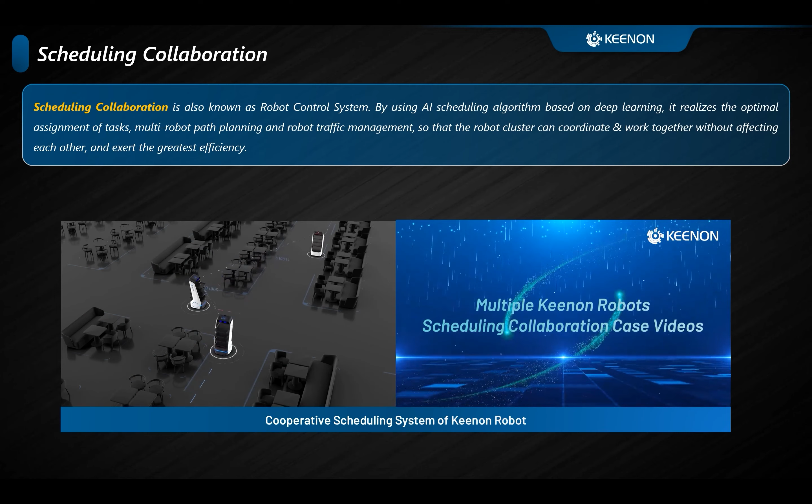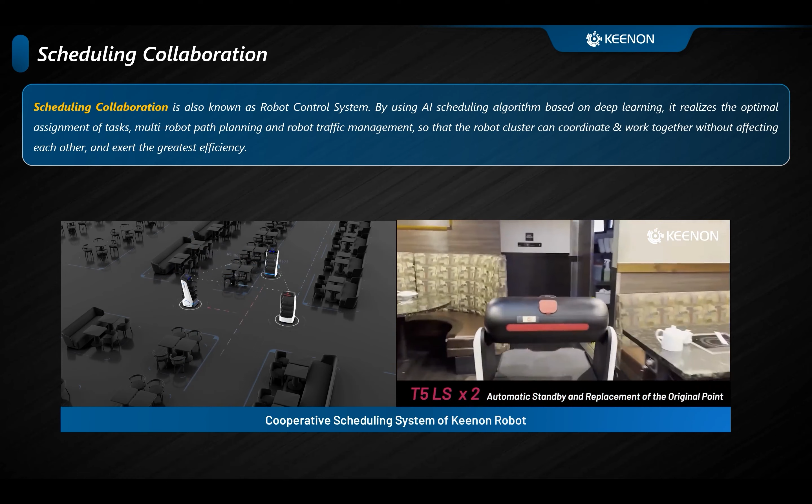Scheduling collaboration is the last term I would like to introduce in this first chapter. It is also known as robot control system. By using AI scheduling algorithms based on deep learning, it realizes the optimal assignment of tasks, multiple robot path planning, and robot traffic management, so that the robot cluster can coordinate and work together without affecting each other and exert the greatest efficiency. Let's see the video below, showing a multiple Keenon robot scheduling collaboration case.

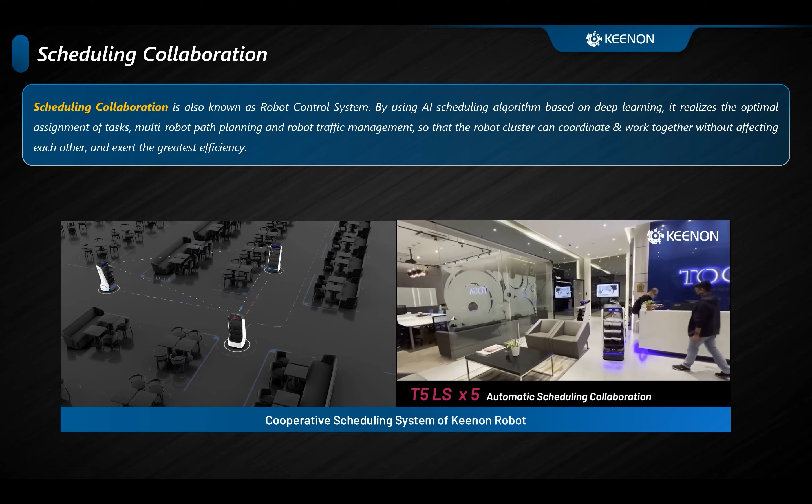After introducing robot-related terms, let's move on to the next chapter, robot-related sensors. They are crucial hardware for the normal operation of a robot, like eyes of a human being.

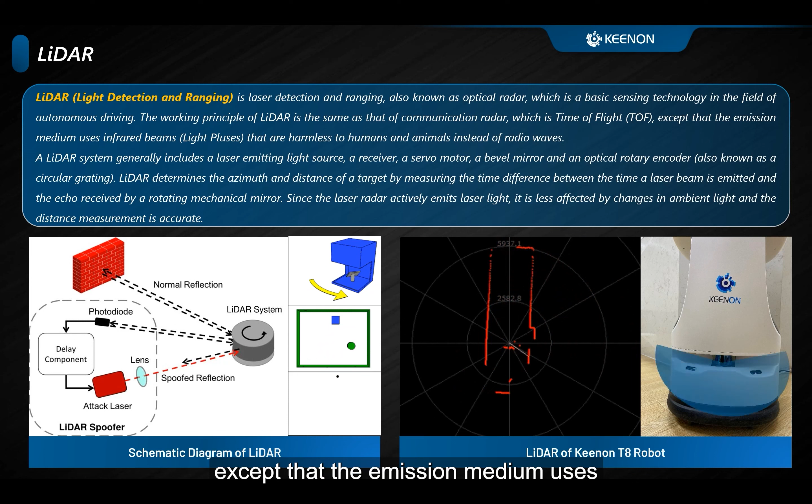The first sensor is LiDAR, which is laser detection and ranging, also known as optical radar, a basic sensing technology in the field of autonomous driving. The working principle of LiDAR is the same as that of communication radar, which is time of flight. except that the emission medium uses infrared beams that are harmless to humans and animals instead of radio waves.

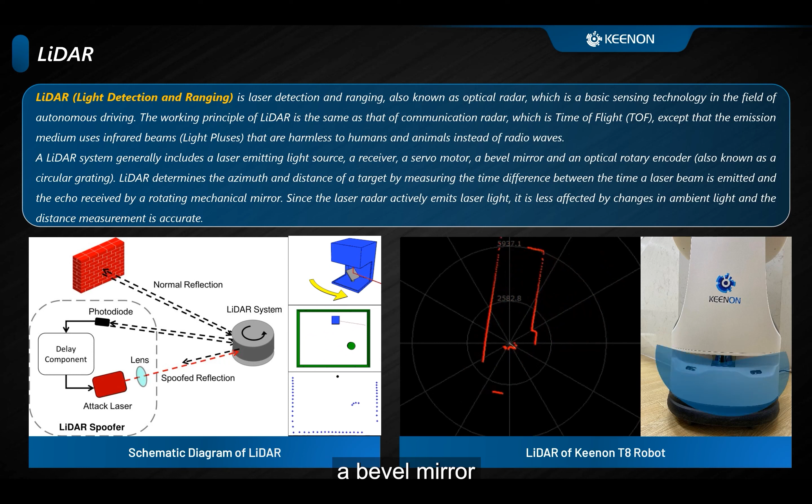A LiDAR system generally includes a laser emitting light source, a receiver, a servo motor, a bevel mirror, and an optical rotary encoder, as is shown in the left figure below. LiDAR determines the azimuth and distance of a target by measuring the time difference between the time a laser beam is emitted and the echo received by a rotating mechanical mirror.

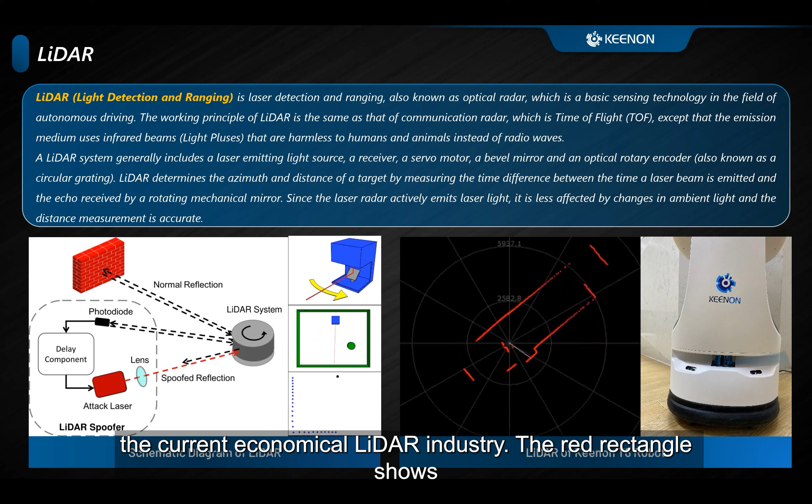Since the laser radar actively emits laser light, it is less affected by changes in ambient light, and the distance measurement is accurate. In the right figure below, it represents the sample rate of T8's LiDAR, which is up to 8,000 and is the highest in the current economical LiDAR industry. The red rectangle shows where the LiDAR is in the T8 robot.

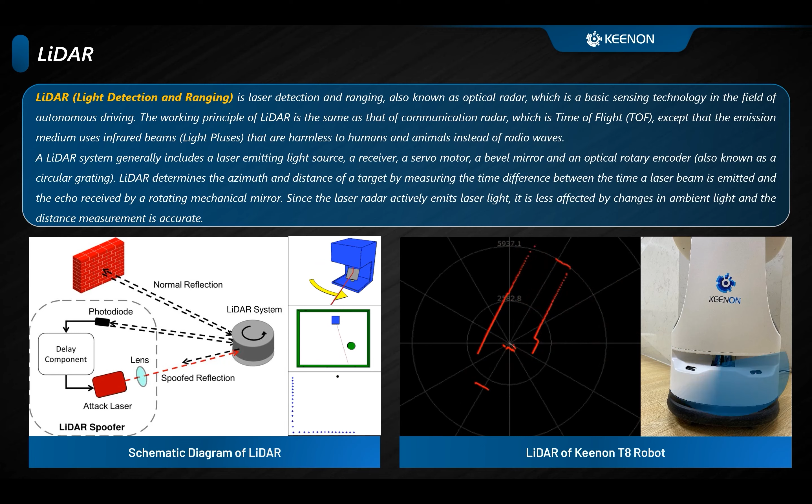Followed by LiDAR, the next sensor I would like to introduce is ultrasonic radar. Although it is not applied in Keenon robots, it is an extremely common sensor in the service robot industry or even other industries. It has a more popular name: reversing radar.

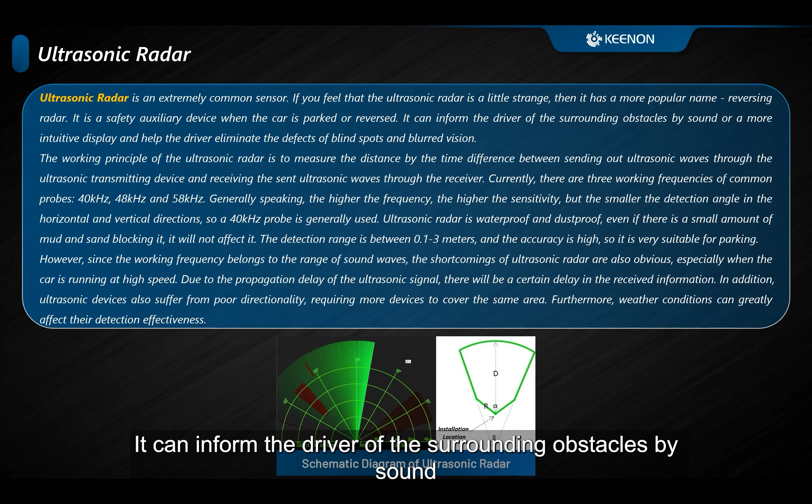It is a safety auxiliary device when the car is parked or reversed. It can inform the driver of surrounding obstacles by sound or a more intuitive display, helping the driver eliminate the defects of blind spots and blurred vision.

The working principle of ultrasonic radar is to measure distance by the time difference between sending ultrasonic waves through the transmitting device and receiving the sent ultrasonic waves through the receiver. Currently, there are three working frequencies of common probes: 40 kHz, 48 kHz, and 58 kHz. Generally, the higher the frequency, the higher the sensitivity, but the smaller the detection angle in the horizontal and vertical directions, so a 40 kHz probe is generally used.

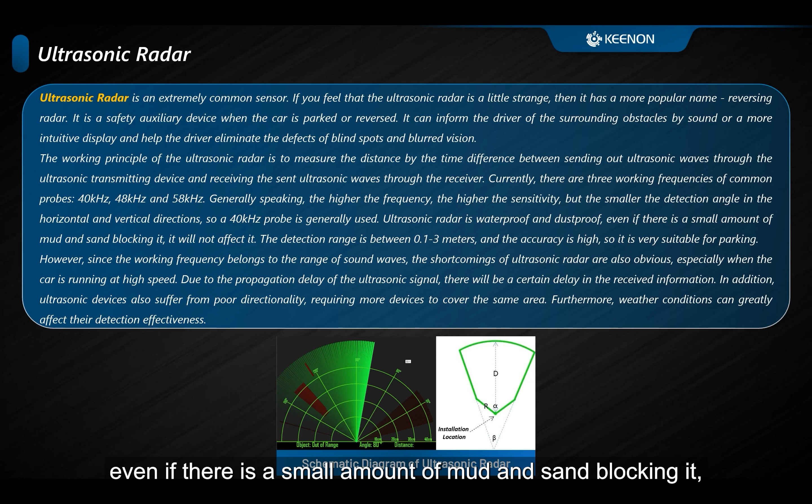Ultrasonic radar is waterproof and dustproof. Even if there's a small amount of mud and sand blocking it, it will not affect it. The detection range is between 0.1 to 3 meters and the accuracy is high, so it's very suitable for parking.

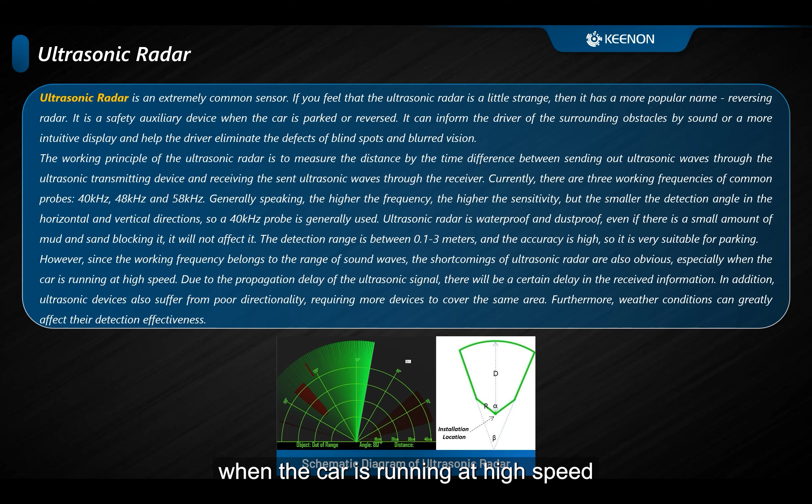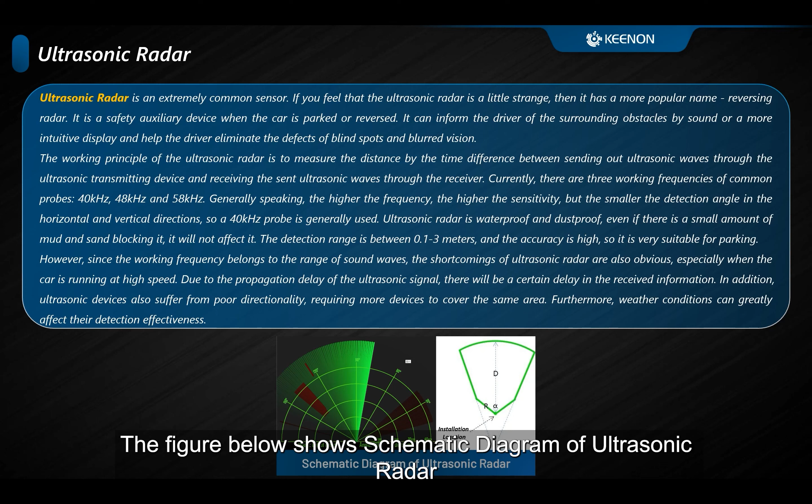However, since the working frequency belongs to the range of sound waves, the shortcomings of ultrasonic radar are also obvious, especially when the car is running at high speed. Due to the propagation delay of the ultrasonic signal, there will be a certain delay in the received information. In addition, ultrasonic devices suffer from poor directionality, requiring more devices to cover the same area. Furthermore, weather conditions can greatly affect their effectiveness. The figure below shows a schematic diagram of ultrasonic radar.

The next sensor is millimeter wave radar. It is a radar sensor that uses antennas to emit millimeter waves with a wavelength of 1 to 10 millimeters and a frequency of 24 to 300 GHz as radiated waves.

Millimeter wave radar obtains physical environment information such as relative distance, relative speed, angle, and direction of motion to other objects by processing targeted reflection signals. The frequency band of millimeter wave is quite special, higher than that of radio, lower than that of visible and infrared light, so it's very suitable for the vehicle field.

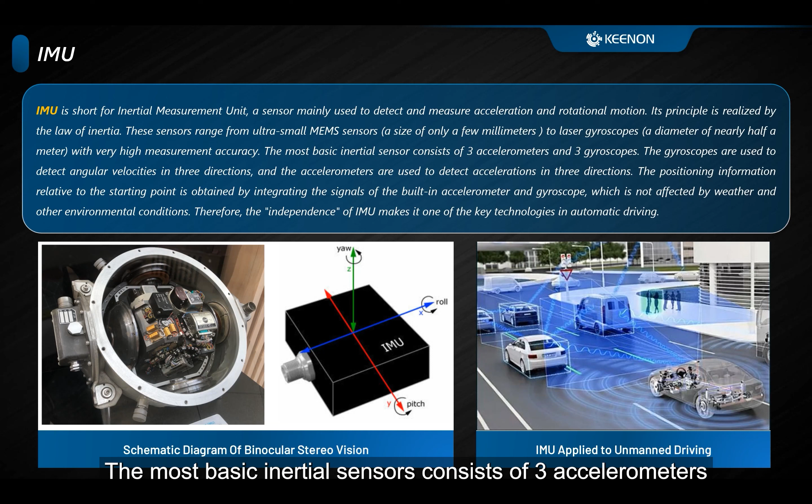These sensors range from ultra-small MEMS sensors to laser gyroscopes with very high measurement accuracy. The most basic inertial sensors consist of 3 accelerometers and 3 gyroscopes. The gyroscopes are used to detect angular velocities in 3 directions, and the accelerometers are used to detect accelerations in

3 directions. The positioning information relative to the starting point is obtained by integrating the signals of the built-in accelerometer and the gyroscope, which is not affected by weather and other environmental conditions. Therefore, the independence of IMU makes it one of the key technologies in automatic driving.

Now, let's go to Chapter 3, Robot-related hardware. They are very basic, but also very important.

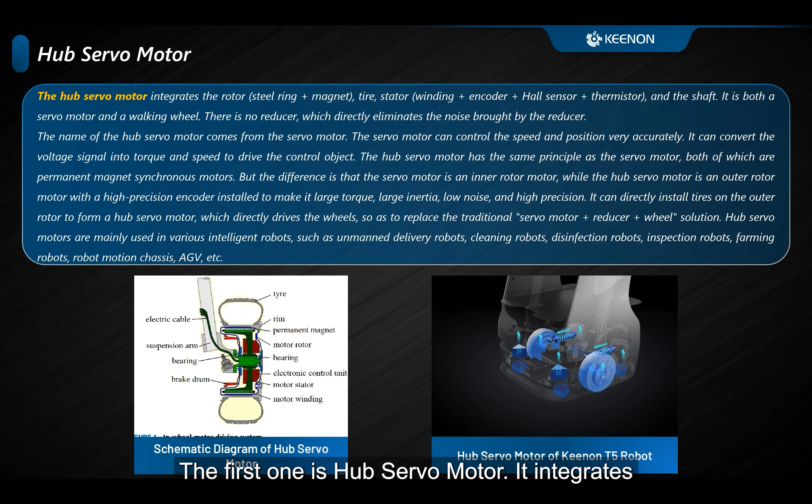The first one is hub servo motor. It integrates the rotor, tire, stator, and the shaft. It is both a servo motor and a walking wheel. There's no reducer, which directly eliminates the noise brought by the reducer.

The name of the hub servo motor comes from the servo motor. The servo motor can control the speed and the position very accurately. It can convert the voltage signal into torque and speed to drive the control object.

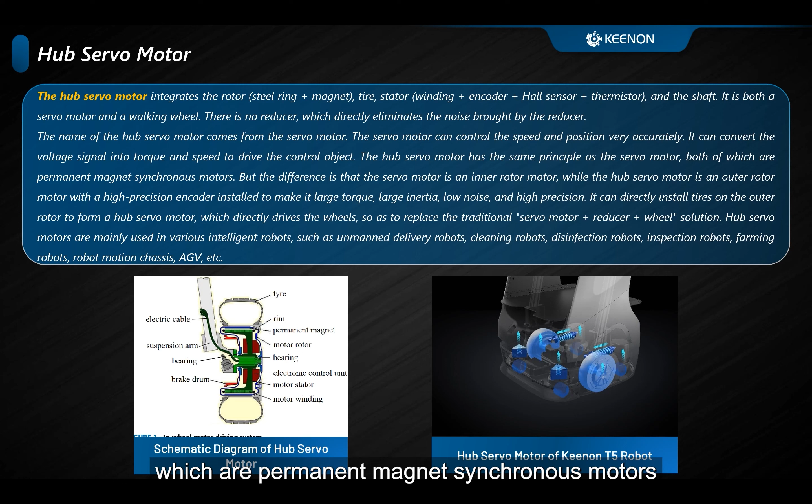The hub servo motor has the same principle as the servo motor, both of which are permanent magnet synchronous motors. But the difference is that the servo motor is an inner rotor motor, while the hub servo motor is an outer rotor motor with a high precision encoder installed to make it large torque, large inertia, low noise, and high

precision. It can directly install tires on the outer rotor to form a hub servo motor, which directly drives the wheels so as to replace the traditional servo motor plus reducer plus wheel solution.

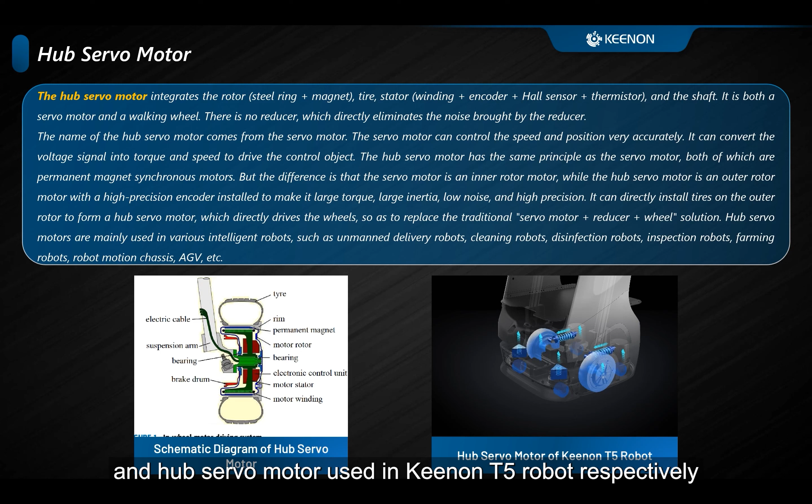Hub servo motors are mainly used in various intelligent robots such as unmanned delivery robots, cleaning robots, disinfection robots, inspection robots, farming robots, robot motion chassis, AGV, etc. The figures below show the schematic diagram of hub servo motor and hub servo motor used in Keenon T5 robot, respectively.

The next one is universal wheels. It is a so-called movable caster, and its structure allows horizontal 360-degree rotation. Casters are a general term, including movable casters and fixed casters. The fixed casters have no rotating structure and cannot be rotated horizontally, but can only be rotated vertically.

These two types of casters are generally used together. For example, the structure of the trolley is two fixed wheels on the front and two movable universal wheels near the push armrest on the back.

As is shown below in the left figure, there are mainstream universal wheels with lock and without lock. There are many kinds of materials for making universal wheels. The most common materials are nylon, polyurethane, rubber, cast iron, and other materials.

It is widely used in mining, mechanical equipment, electronic equipment, medical equipment, engineering, decoration, textile, printing and dyeing, furniture, logistics equipment, warehouse, turnover vehicles, chassis, cabinets, dust-free workshops, production lines, large supermarkets, etc. For Keenon robots, there are 4 universal wheels at the bottom, which are shown in the red rectangles in the right figure.

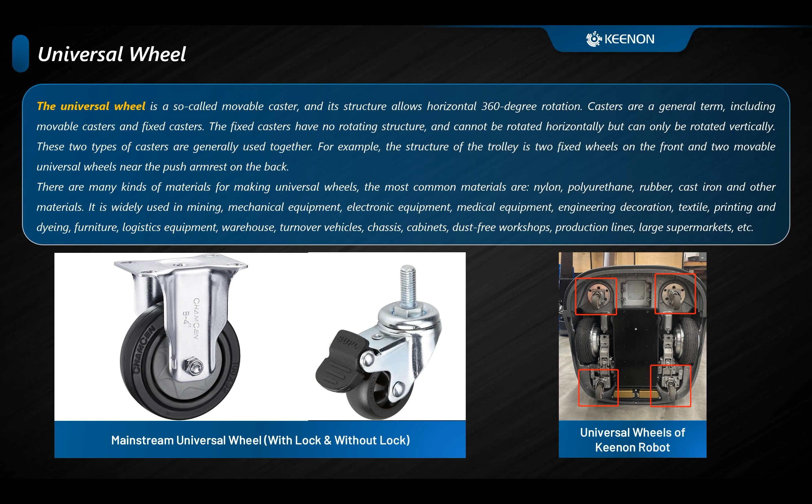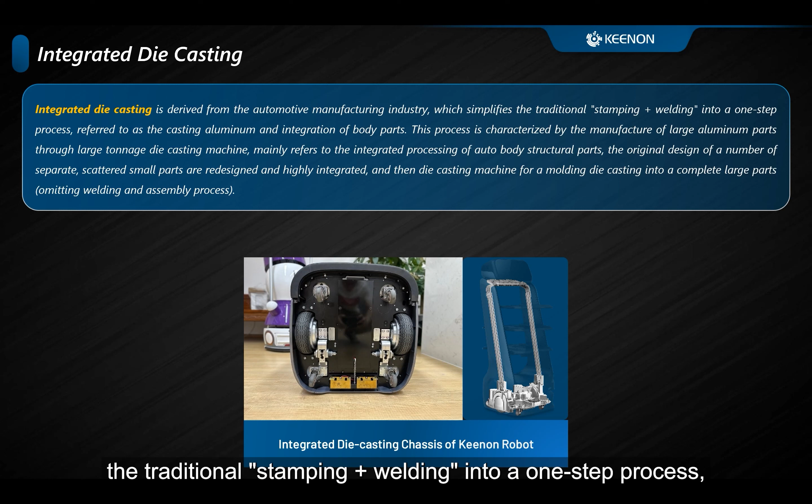The last one is integrated die casting. It is derived from the automotive manufacturing industry, which simplifies the traditional stamping and welding into a one-step process, referred to as the casting aluminum and the integration of body parts.

This process is characterized by the manufacture of large aluminum parts through large tonnage die casting machine, mainly referring to the integrated process of auto body structure parts. The original design of a number of separate, scattered small parts are redesigned and highly integrated and then die casting machine for a molding die casting into a complete large parts.

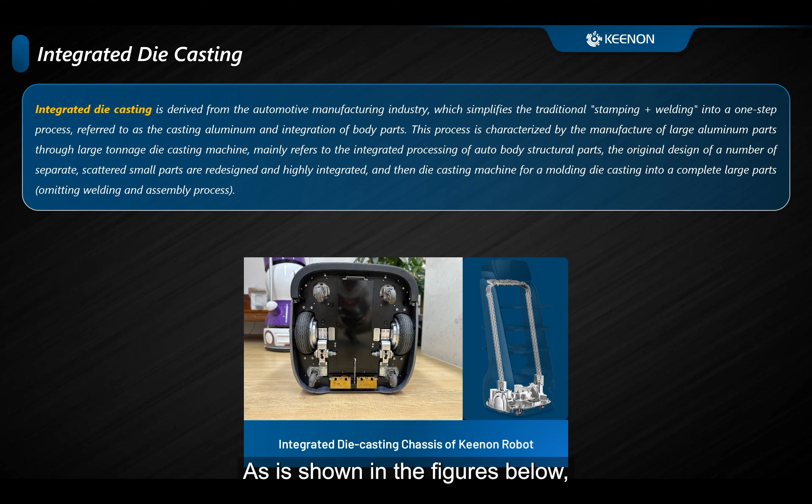As shown in the figures below, some Keenon robots are using integrated die casting chassis.

Now, we are at chapter 4, robot-related wireless technology. In this chapter, I will introduce some key wireless technologies for service robot.

The first one is 4G LTE. 4G is an abbreviation of the fourth generation communication system. In the definition of the ITU, any wireless data network system that reaches or exceeds 100 megabits per second can be called 4G. The full name of LTE is long-term evolution, a literal translation of long-range evolution.

LTE is divided into 2 duplex modes, namely FDD-LTE and TDD-LTE. LTE significantly increases spectrum efficiency and data transfer rates, with peak rates of up to 50 megabits per second upstream and 100 megabits per second downstream. Compared with 3G era, the downlink peak of 10 megabits per second is 10 times faster.

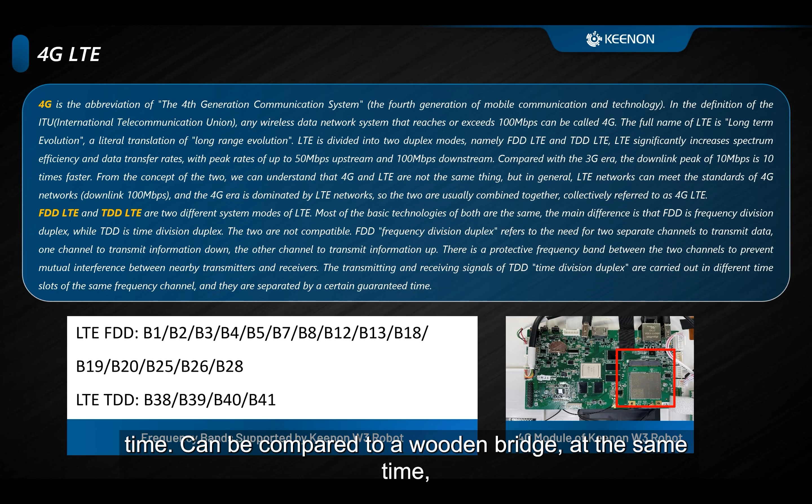The transmitting and receiving signals of TDD, time division duplex, are carried out in different time slots of the same frequency channel, separated by a certain guard time. It can be compared to a wooden bridge, where at the same time only one side of people can pass through - that is, the data upload and download alternate in the same channel.

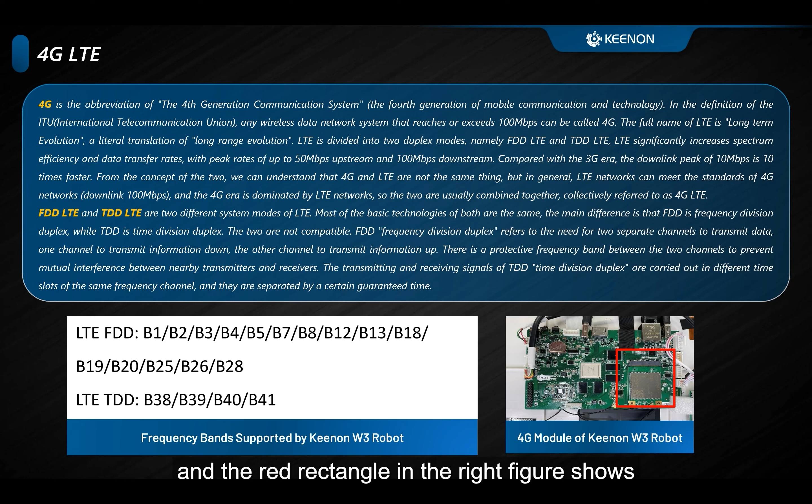The left figure below lists the frequency bands supported by Keenon W3 robots, and the red rectangle in the right figure shows the location of the 4G module inside the Keenon W3 robot.

The next one is Wi-Fi, which is a well-known wireless technology even in our daily life. It is a wireless LAN technology created in the IEEE 802.11 standard. Because of the close relationship between the two systems, Wi-Fi is often used as a synonym for the IEEE 802.11 standard. Since the release of the first generation of IEEE 802.11 standards in 1997, the 802.11 standard has evolved through 6 versions.

Before the release of Wi-Fi 6, the Wi-Fi standard was identified by version number, from 802.11b to 802.11ac. With the evolution of the Wi-Fi standard, the Wi-Fi Alliance has chosen to use a numeric serial number to rename Wi-Fi, in order to make it easier for Wi-Fi users and device manufacturers to understand the Wi-Fi standard.

Similar to traditional transistor radios, Wi-Fi networks transmit information over the air using radio waves, a type of electromagnetic radiation that has longer wavelengths in the electromagnetic spectrum than infrared light. Wi-Fi radio waves typically have a frequency of 2.4 GHz or 5.8 GHz. These two Wi-Fi bands are then subdivided into multiple channels, each of which may be shared by many different networks simultaneously.